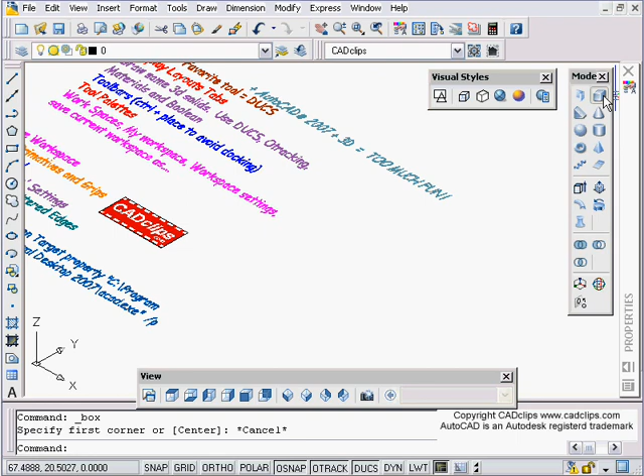We can start off with just our box command, switching over here to a 3D isometric view, seen this many times. We can click on here and type in numbers, and use our object snap and object tracking, etc. to do this. It doesn't matter how we pick the points. I go in, start here, click. Again, doing a rectangle, I can use snaps and at, and use my different options depending on if I have dynamic input turned on, etc. But the main thing is I can draw that and then drag it up.

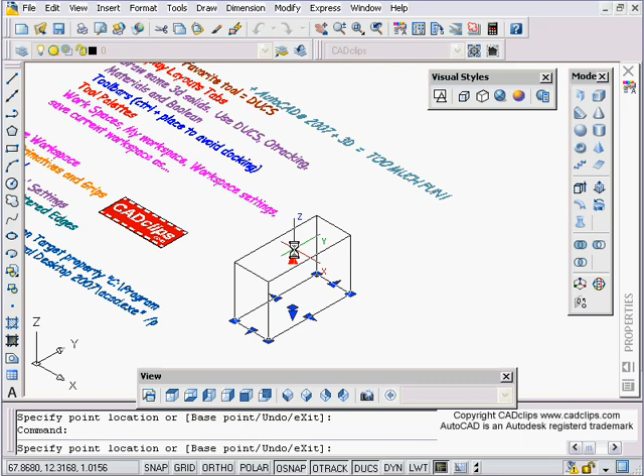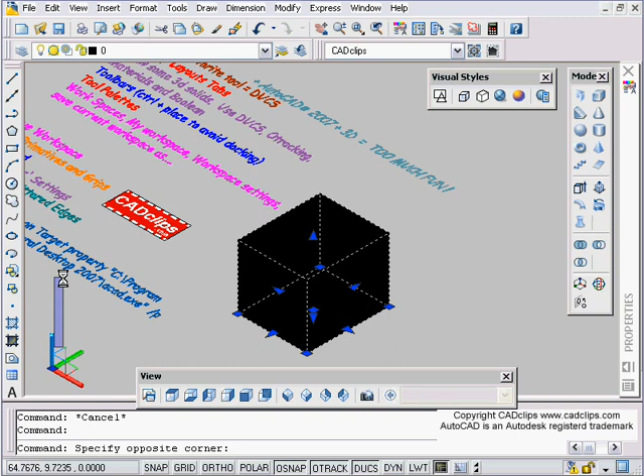Once I have that, I can grip on that solid object now and stretch it out. If you grab the square grip in the middle, we can move it, depending on how you want to do that. Then, of course, depending on your visual style, click on here, you might be able to move some objects around. Remember this guy over here, by hovering on there we can do that, etc.

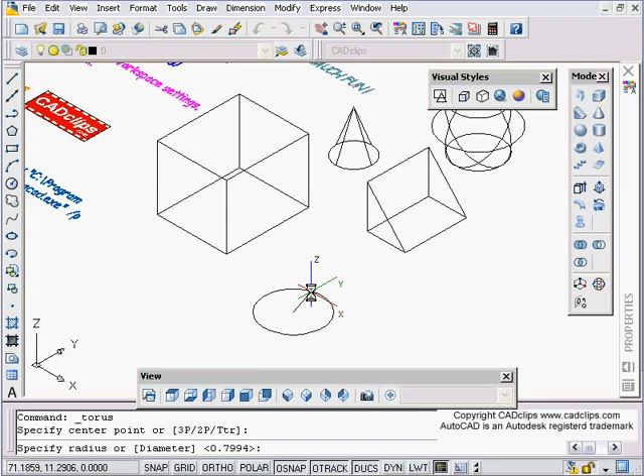Now we can go and draw some more shapes as we saw before, and they all have their own characteristics. Cone, draw them up. Sphere, okay. A torus - read the command line: specify center point here, specify radius or diameter here, and then the thickness of the wall there. M for move it over, okay. Pyramid, kind of like a square. Again, you can use your ortho if you want. You can also read your command line and type in numbers, etc.

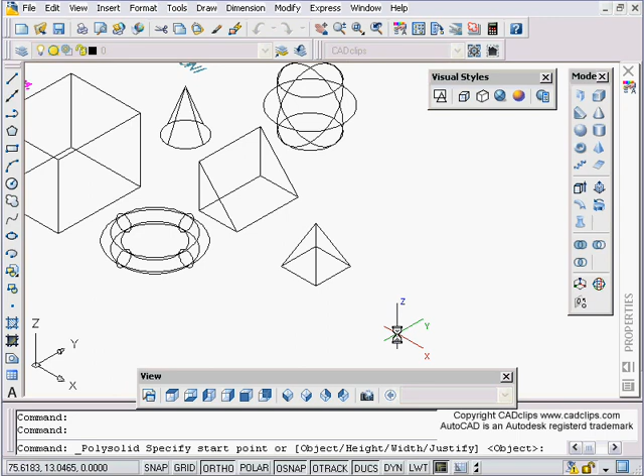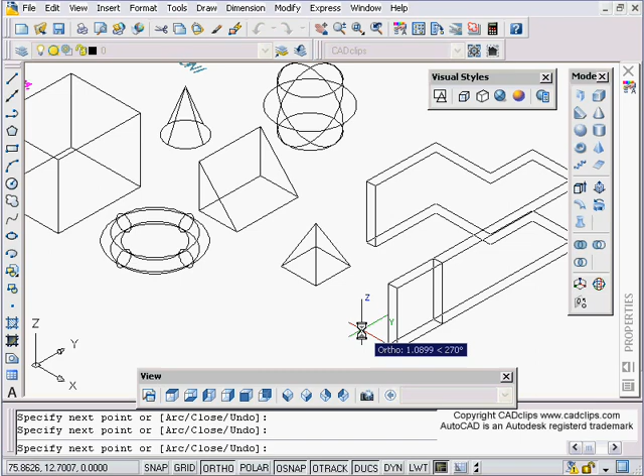Got a new one over here, polysolid, which is kind of like drawing a wall. First thing we want to probably do is specify a height, H for height, and say I want it to be this high. Then I'm going to say W for width, and I want it to be this wide. Then I can pick some points. The new polysolid command works really good. Oh, after all that, I hit escape too quickly - good thing it remembers my settings. Enter. Hitting escape doesn't do it.

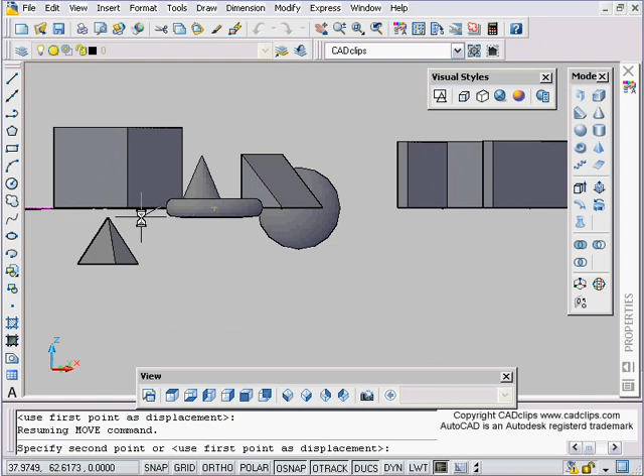Okay, switch between my different views. Now what's interesting is if you take these and move them around, you'll notice that they blend in and out of the objects a lot nicer. So you can tell that that's on the same elevation as that. If I move this from the end point of here to the end point of there, now when I move this around it's not going to really interfere with anything - it was placed underneath that as I move it around.

So let me undo that right back to its original location. So I can take this, and as you move these objects through each other, you can see it's really nice that you can kind of tell visually where they are.

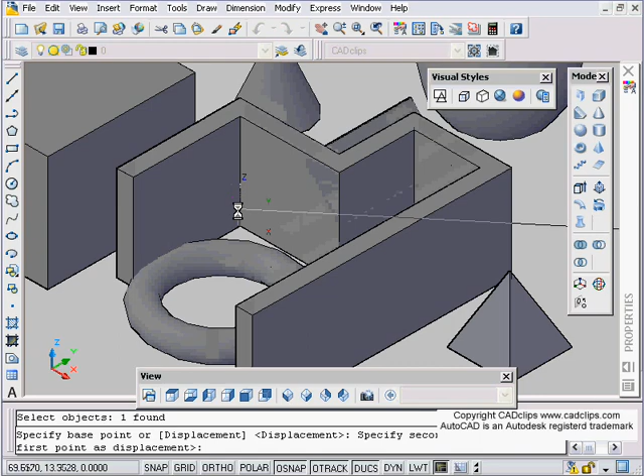I don't know what to say. This is just huge improvements, visually being able to see if things interfere.

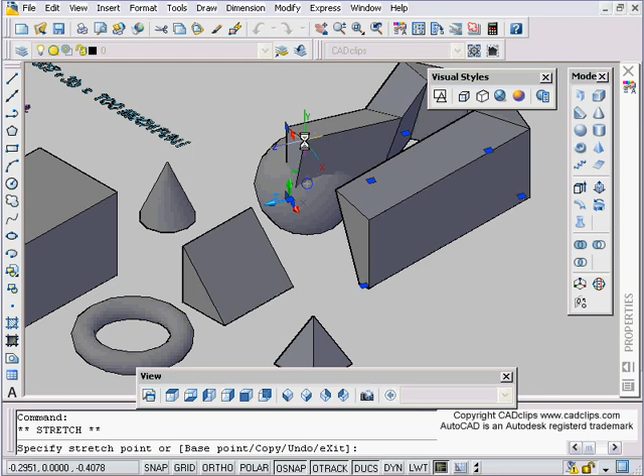Okay, we can place that on there, hit escape. You can click on it and then grab these grips, and you can move these around. This poly-solid in particular, you can do some really neat stuff with it because you can grab these grips and stretch the width factor, etc. Maybe bump that out like that.

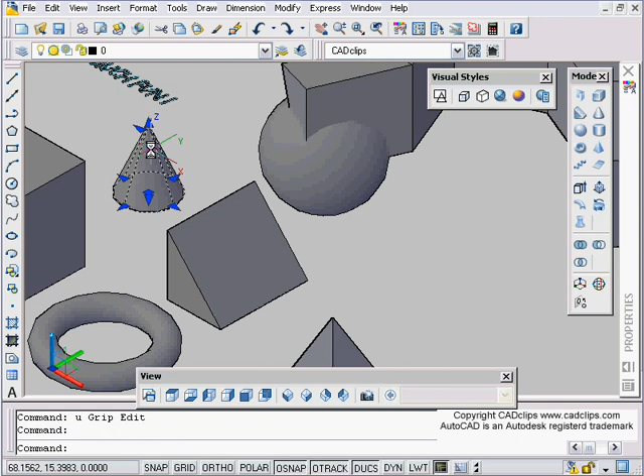So poly-solid is just a super fantastic tool that you can use to create whatever you want. Other objects, depending on what you have, will depend on where your grips are with those objects.

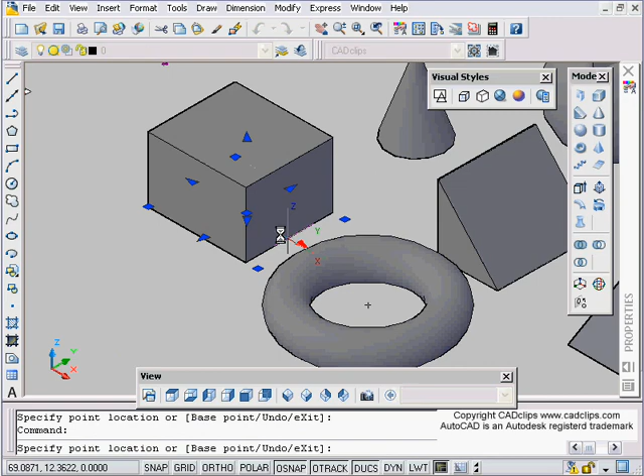Again, using your object snap, whatever you want. Add your materials later, go in here, click on this. Starting to look like what some pretty high-tech animation and 3D solid modeling softwares have had, and we're very grateful that Autodesk has now got on board with that, so we can use that.

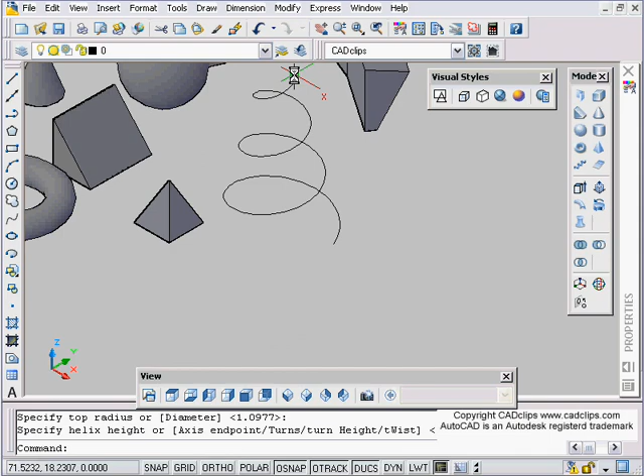Those are our primitives inside of here. We also have a helix. Pick on the helix, we're going to read our command line. Specify the center point here, specify the base radius here, specify the top radius here, specify up. I don't know what else to say, that is just super fantastic.

And then you can use these objects and extrude things around them and stuff, and again that has grips. So I know, of course, mechanical people have great use for this type of thing.

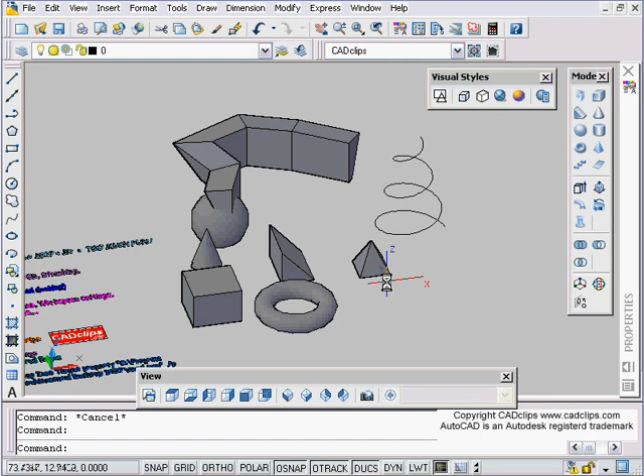So there's just some of the primitive objects that come with AutoCAD 2007 in 3D, and we're going to work through some more of these over here. Again, this is the modeling toolbar.

Right click, modeling. We're going to get into some more of these with our extrude and push pull and stuff like that, where you can go in and pull faces off and all kinds of great stuff like that. Push, pull, pick on here, pull that face out.

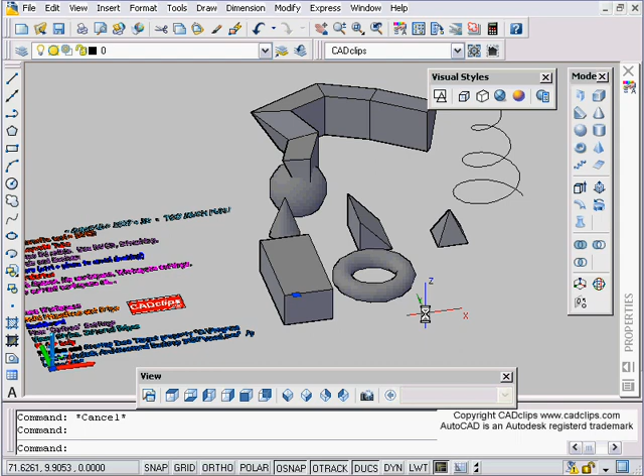Once you've done that push pull, you'll notice you'll lose your grips. I can go down to here and pick on this object, and I can grip it and do all kinds of great stuff with it. Once I go in here and use my push pull, pick that face, I can pull that face off, which is really nice. Same as I can go over to here, pull this face off.

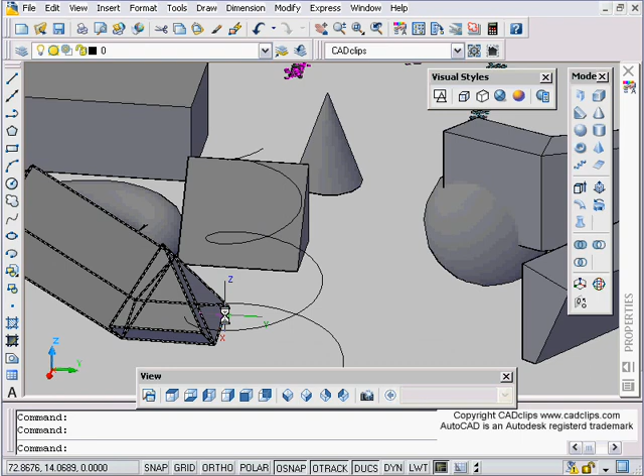Once you've altered it, I'm going to use shift middle mouse button here. Once you've altered the object, it loses all its great little primitive grips, and of course you can do other things with it as well.

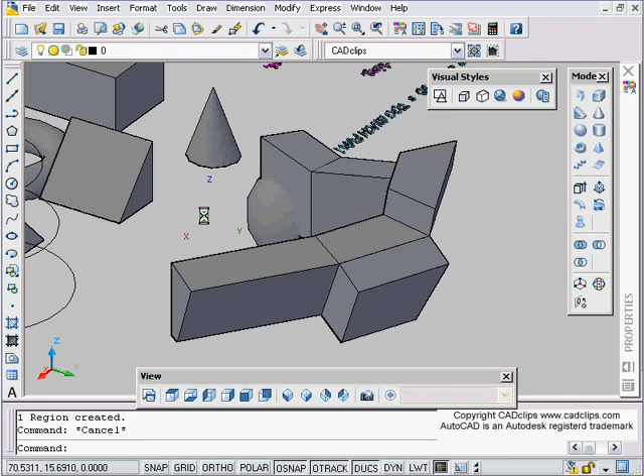We're going to come back with the push pull tool specifically to start doing some of that stuff. You want to have some good video memory as well, so you can see there's our push pull, which is starting to look like what some other 3D applications have had for a long time. So once again, thanks to Autodesk for bringing this into us.

So back to wireframe, let's go back to our top view. That's again just an intro, we're going to do some more stuff on this as we move through these lessons. So, solid primitives and some grips, and there's our toolbar.

The dashboard: if we go up here to Tools, Palettes, the dashboard palette specifically, and again we can have our auto hide turned on or off with this just like any other palette. The dashboard has a set of control panels. If we right click on here, we go to control panels: there's 2D drafting, 3D make, 3D navigation, visual styles, lighting, materials, rendering. Those are all available. These are the individual panels that we see over here.

Once again, this is just an introduction. We're not going to go into great detail with this. We're going to come back and revisit. But you'll notice a lot of this stuff here is repeated basically from over here.

This is the modeling toolbar over here. This is the 2D drafting, and then we have different flyouts if there's not enough room to show all the objects on that individual toolbar. So the dashboard, again, tools, palettes, dashboard, which is what we're seeing here, is a control panel of toolbars.

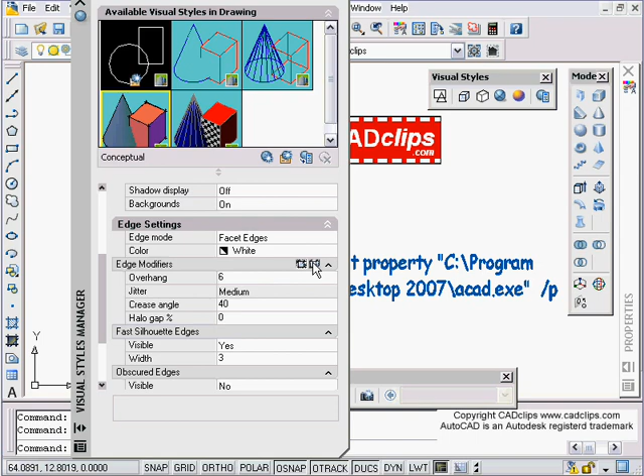You can go in here, and we'll do this later. You can add jittering so you can get an effect so that you're getting a jittering effect with those on edge modifiers. So you can add those in. And you can click on here and see some more options as well. We'll come back and get to this.

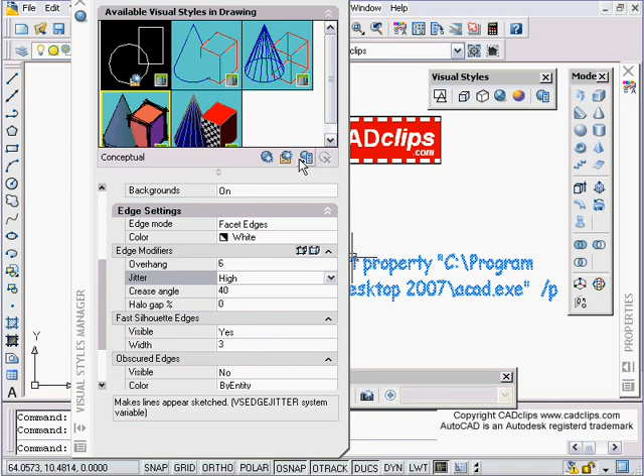We've seen this in other CAD software where you basically make all your lines look kind of squiggly, which is very nice for any sort of, you know, you want to make it look kind of napkin sketched or whatever, and this works in 2D or 3D. So jittering medium, well, maybe we'll make jittering high. And then go to here and export - where do we want? Apply to current. So there is added some jittering. So look at what it's done to the text. It's made the text that way.

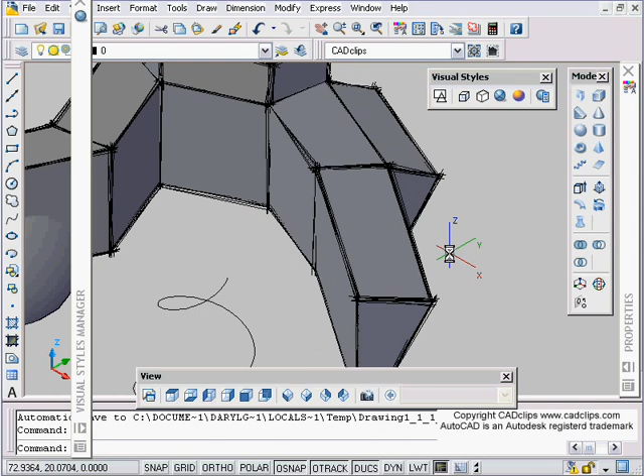And it's also taken our 3D objects over here. Let me turn my auto hide on. Okay, I've turned jittering on in this particular visual style. If I even go to my 3D view, it doesn't matter. That's jittering turned up high instead of low or medium.

You can do some really neat stuff. Go back to my 3D hidden line. Depending on which visual style I go to, and that one happened to be my conceptual style. If I go back inside of here, we can hover over these and it'll tell us there's conceptual. That's the one I just changed.

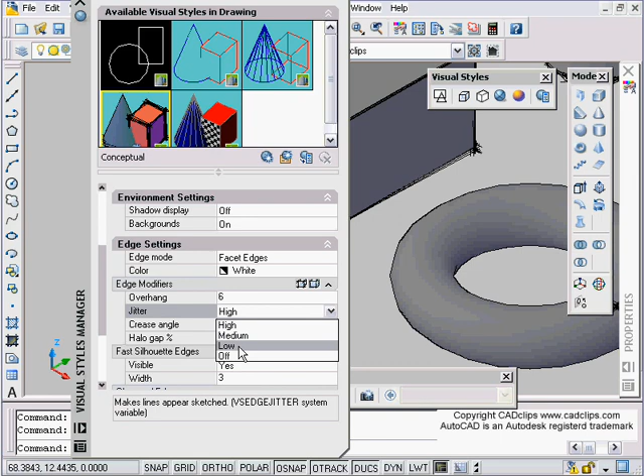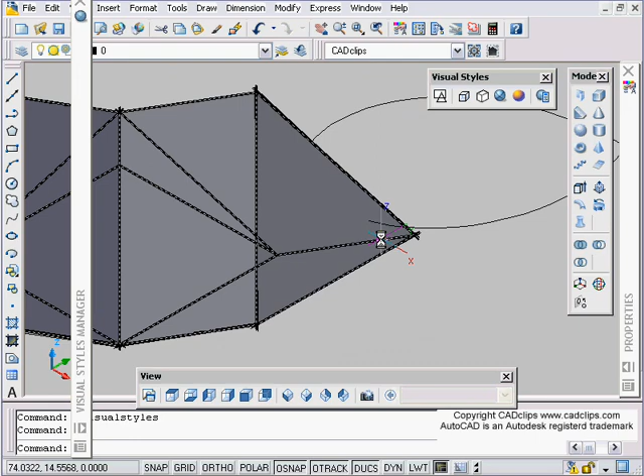Well, maybe I'll go back to conceptual and say jittering is medium, high, medium. You can put some numbers inside of here and all kinds of great stuff. Have a look. The only way you learn is try it out, and then hit our apply button, and there's our new visual style. So this is really neat for architects, to make it look kind of hand-drawn. But for whatever reason, I'm going to start using this.

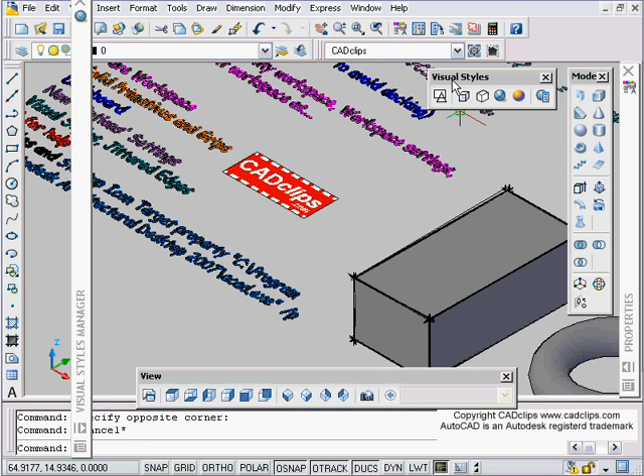I already have. So a little bit about visual styles. Don't get that mixed up with your actual workspace. Workspace sets up the appearance. Visual style is the way these objects, your modeling objects, appear. That's controlled with visual styles.

Go back down to here, and also notice that when you change from view to view, it doesn't change, where you used to do a regen all the time. Now, if you want to actually go to 2D wireframe, you go to 2D wireframe, and you go back to conceptual style over there.

So there's some visual styles, a little bit of jittering. Hit F1 anytime you want to start a command. If you want to know how the push-pull command works, start the push-pull command and then hit F1, and it'll start up your help and it'll go straight to that command. This has always been there.

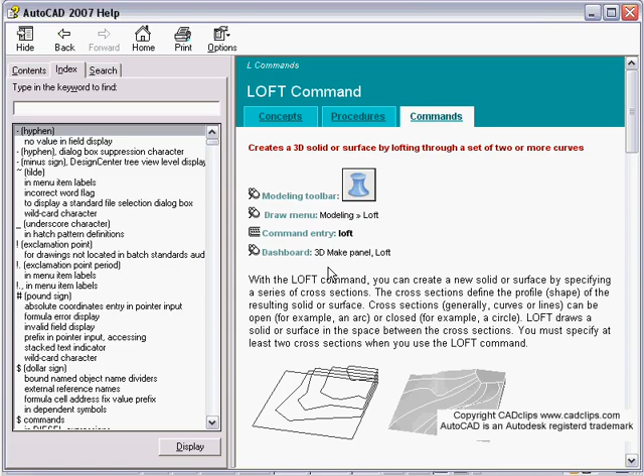This has been typical of AutoCAD for many releases. So anytime you want help on something, start the command, go over here and say loft, and then hit F1, and then there it is. It's going to give you some information on how you do that. Different tools and stuff. So use your F1 and get some help.

Profiles and the startup icon. All I want to talk about here is an oldie but a goodie: when you start up your AutoCAD, depending if you have Architectural Desktop or not, if you right click on your AutoCAD startup icon and you go to the target field, you can place a /P, which loads a profile, and we put this in quotes. So if you have an AutoCAD profile saved, you can start up your AutoCAD and put a flag on there, /P.

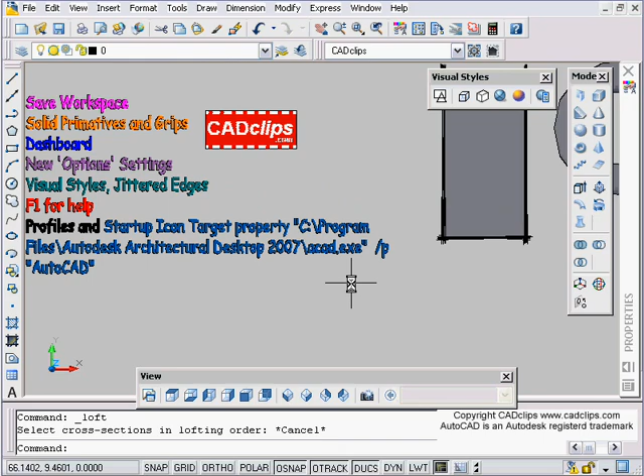And there's a /T, and there's a couple other switches. I called that a flag, it's a switch. So when we start up our AutoCAD, we can put a profile switch and it loads a specific profile. Our profiles, of course, are all saved under here under Options. Profiles, there's the one it's loading. We can read up a little bit more on profiles.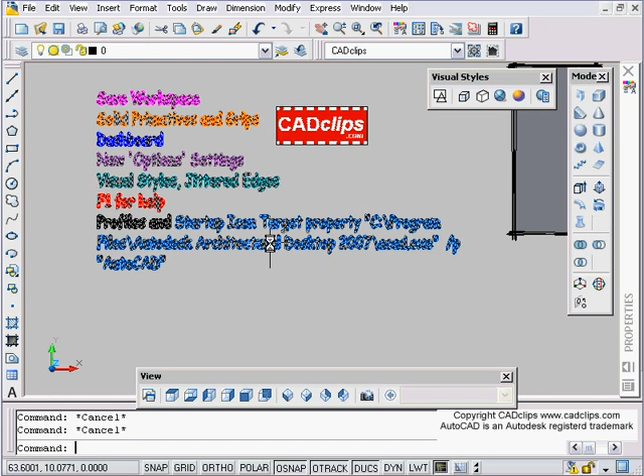Workspaces have kind of alleviated some of the work. We used to use a profile to save a lot of our stuff, and now we can use workspaces and visual styles to accomplish that. So again, kudos to Autodesk for helping us out with that.

So that's all I wanted to talk about in this particular lesson: our workspaces, solid primitives and grips, our dashboard, some of our option settings, visual styles, jittering, lots of fun. Use your help F1 in the middle of a command, and then just a little old trick that we use to put a profile switch when we start up our AutoCAD.

It will load that particular profile for us, and we can have more than one startup icon, therefore starting up our AutoCAD to look different ways and call up different profiles. So tune in for our next lesson, where we'll probably slow it down a little bit and dig in deeper with some of the specifics of using 3D for AutoCAD 2007.